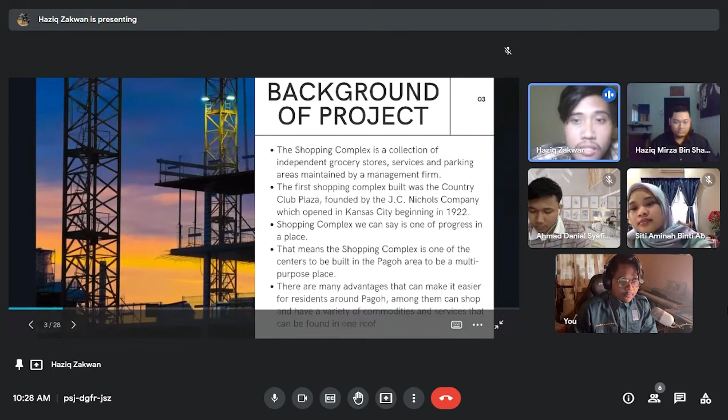Next is about the background of the project. A shopping complex is a collection of independent grocery stores, services, and parking areas maintained by a management firm. A shopping complex is one of the signs of progress in a place, meaning it is one of the centers built in the Pagoh area to be a multi-purpose place. There are many advantages that make it easier for residents around Pagoh, among them being able to shop and access various commodities and services all under one roof.

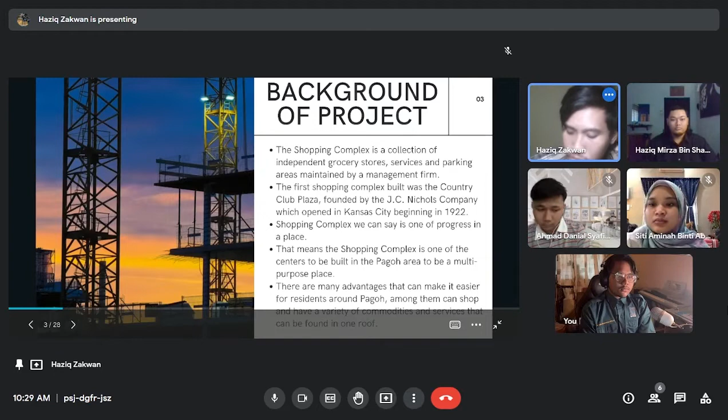For the objective, first, to make it easier for students to use the service, accessibility, and facilities that enhance the shopping experience at the mall and in the surrounding area.

Second, to develop a marketing strategy for acquiring new customers, particularly students, and increase market share. The shopping complex has a large customer base but few student customers. This marketing plan will include marketing goals and strategy for increased market share. Because the shopping complex is not on the normal walk to the university, innovative and strategic proposals are required for successful delivery.

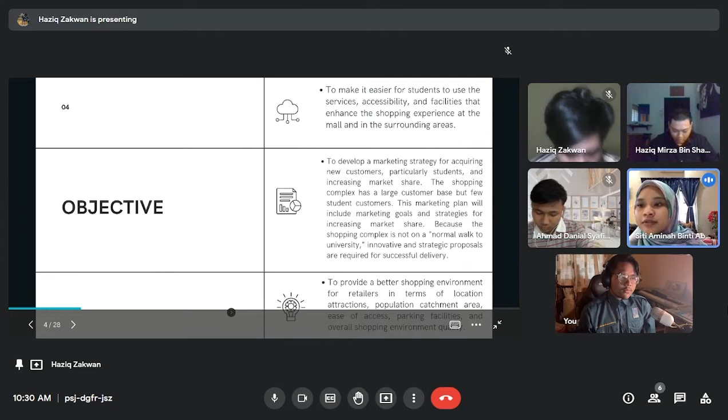For the substructure component of the complex, what is substructure? The substructure is the lower portion of a building that is built below ground level. Its function is to transfer load from the superstructure to the underlying soil, and as a result, the substructure has direct contact with the supporting soil.

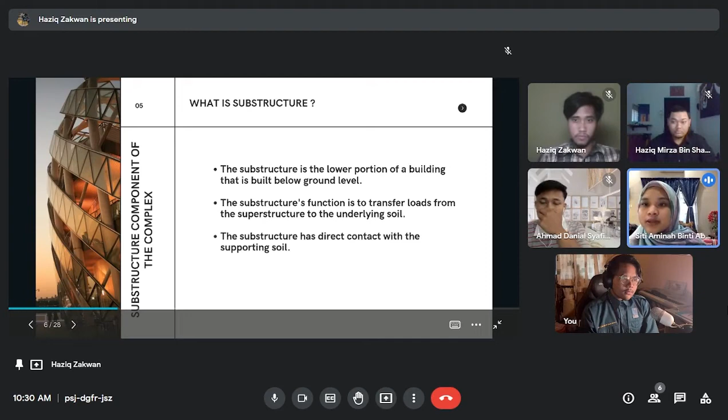For the function of substructure: it transfers load from the superstructure to the supporting soil, and is responsible for transferring load from the superstructure to the underlying soil. As a result, the substructure has direct contact with the supporting soil. It is a portion of a building built below ground level, the structure that is below the plinth, and lastly, a type of level or base that supports the superstructure, walls, columns, and the structure at plinth level.

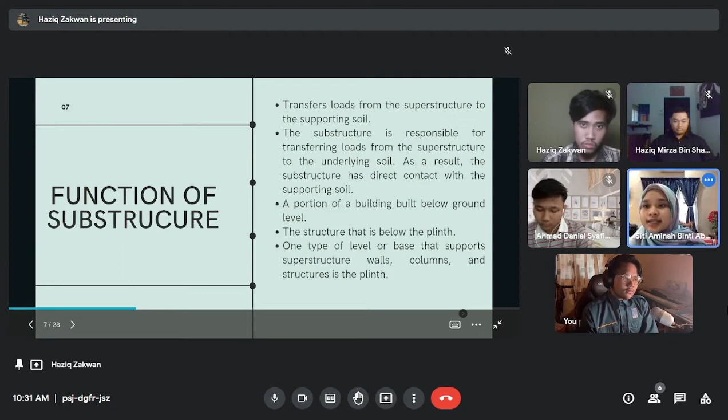For the foundation, it is the structure deep in the ground that is in direct contact with the superstructure. The foundation transfers all dead, live, and other loads that pass through it to the underlying soil. The foundation is built in such a way that the soil beneath it is stressed within its safe bearing capacity. Any foundation failure leads to the collapse of the building structure.

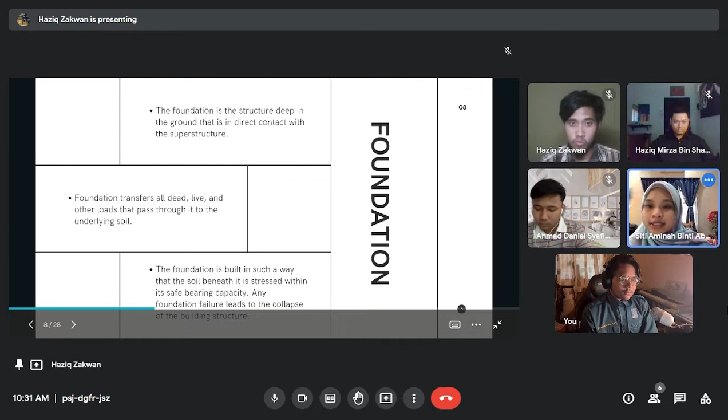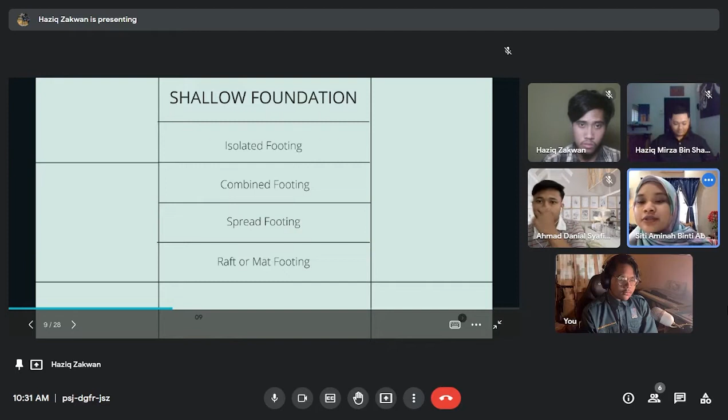The types of shallow foundation are four: first is isolated footing, second is combined footing, third is spread footing, and the last is raft or mat footing. That's all from me, thank you.

Deep foundation has two types: first is pile foundation, and the second is caisson foundation.

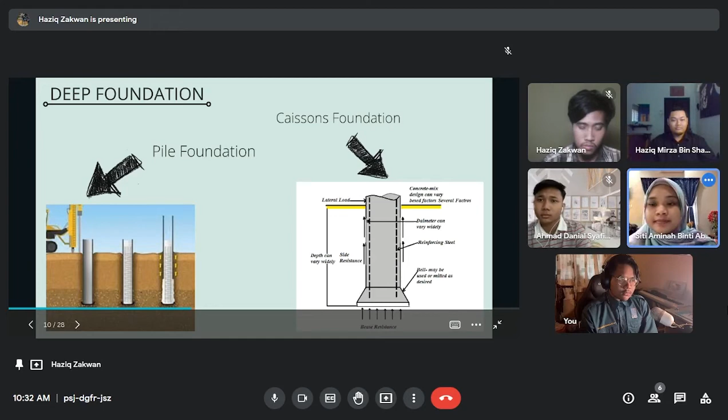Next, the foundation for the complex. For the foundation of the shopping complex, we use raft foundation. A raft foundation is actually a thick concrete slab resting on a large area of soil, reinforced with steel, supporting columns or walls that transfer load from the structure to the soil.

Usually, the raft foundation is spread over the entire area of the structure and its supporting soil. Raft foundation is generally used to support structures like residential or commercial buildings where soil condition is poor, storage tanks, silos, and foundations for heavy industrial equipment. Raft foundations are a type of foundation with high integrity in which foundation piers are connected together using a large foundation slab to form a massive structure, and the foundation piers are connected through beams.

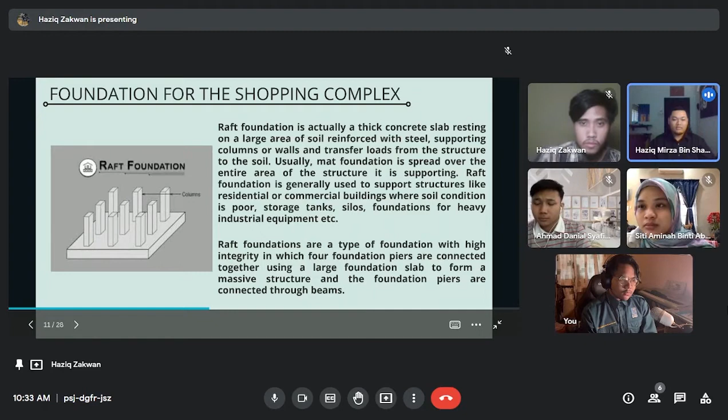Next, I will discuss the superstructure. People will spend the majority of their time in a building's superstructure. This covers the first and second floors of a house, as well as any number of levels in bigger buildings. Beams, columns, finishes, windows, doors, roof, floors, and anything else are all part of the superstructure. Parts of the superstructure are significantly longer than parts of the substructure.

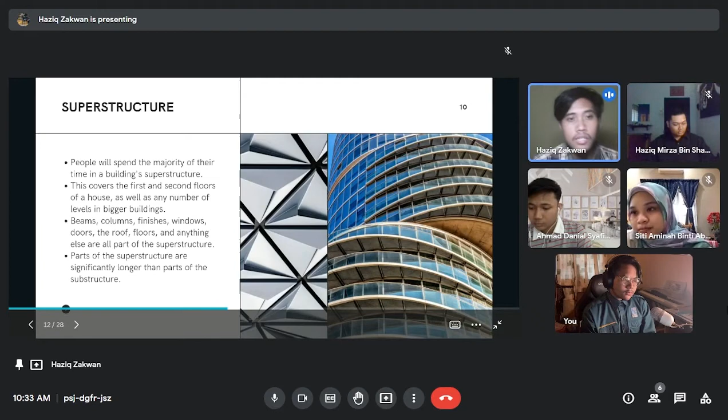This is the function of superstructure. First, the internal and external components of a building are visible above the substructure. Second, it is the structure from the plinth to the roof of the building. Third, it is above the bearing structure and the wearing surface. Fourth, this structure transfers load from the building's upper level to the substructure.

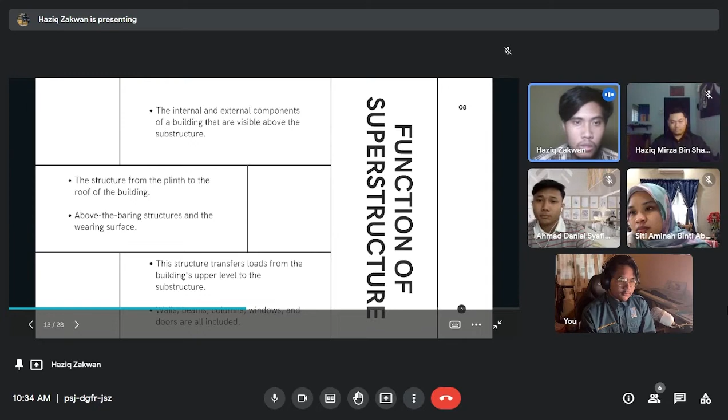This is the parts of the superstructure that we have in our building: the floor, the roof, the beams, the columns, the walls, and lastly the transportation structure.

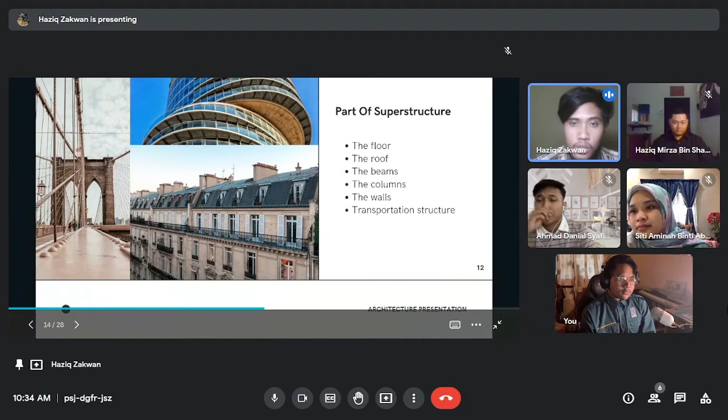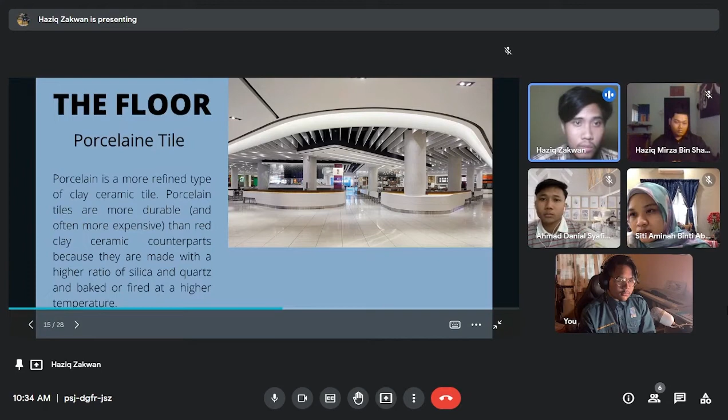The first is the floor. The floor that we use is porcelain tile. Porcelain is a more refined type of clay ceramic tile.

The second one is about the roof. The roof that we use is a flat roof. These roofs are not suitable in areas where the roof may become saturated by rain and leak, or where water soaks into the brickwork. Thank you.

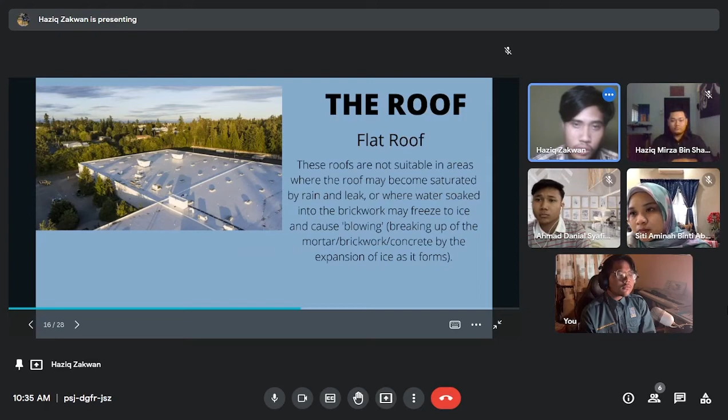Okay, I would like to continue.

The next is beam. Beam has four types, which is cantilever, fixed, simply supported, and overhanging. A beam is a horizontal structure element that spans distance between one or more support and may transmit vertical load across its longitudinal axis.

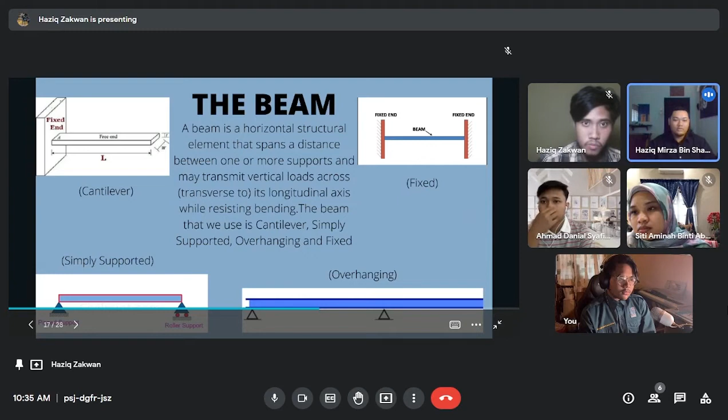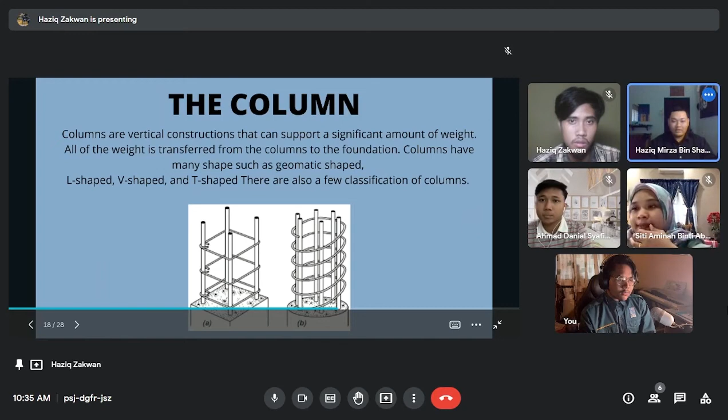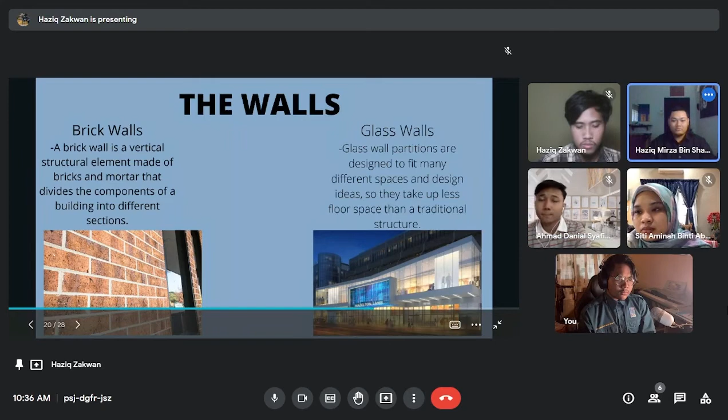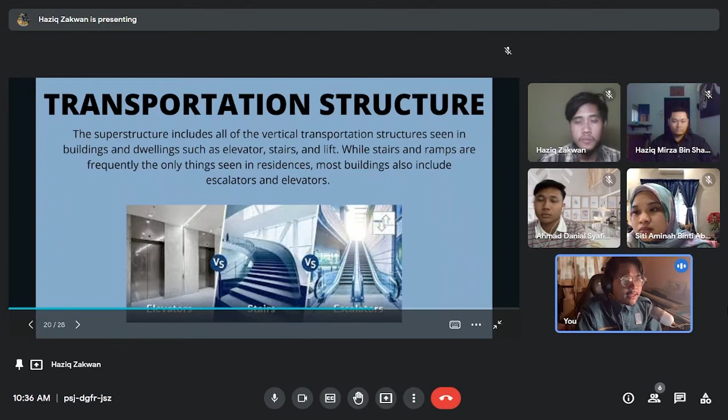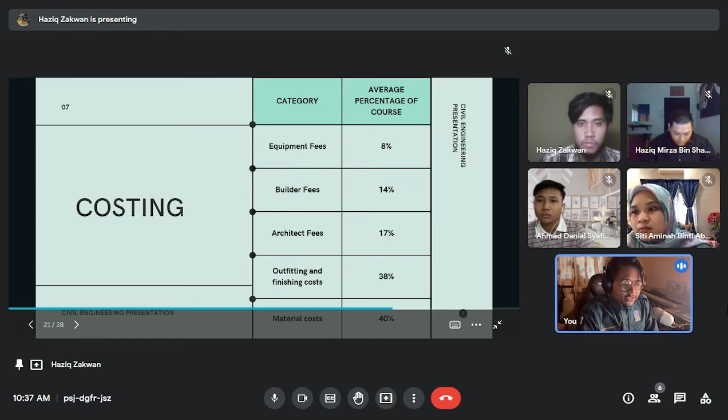Fees for an architect and a builder may be added to the total cost. So the categories for this cost are equipment fees, which is 8%, builder fees, which is 14%, architect fees 17%, outfitting and finishing cost 38%, and material cost, which is 40%.

So apart from that, there is also a breakdown of costing involving the number of professionals who will be working on the construction site. Under the general contractor, this number of professionals will perform the task to carry out the project. However, professionals can also be hired separately to save on the final cost of the project.

This number of professionals also plays an important role in determining the cost for a construction project to be carried out. The following is a list of expected costs for labor payments during the project development. The professionals involved are painter, electrician, excavator, mason, carpenter, plumber, and also structural engineer.

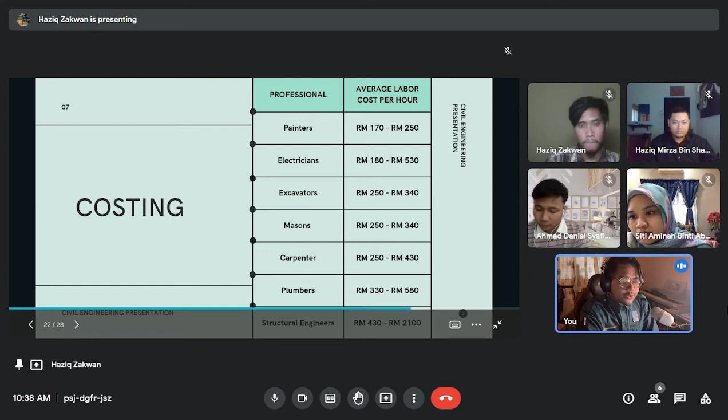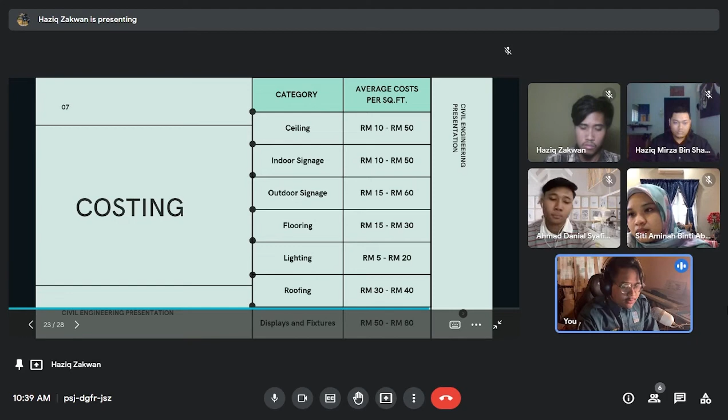So the category for this cost is ceiling, indoor signage, outdoor signage, flooring, lighting, roofing, and also displays and fixtures. So that's all from me. Thank you.

Alright, for the project management and project planning, the important factors which can cause a construction delay during the initial stage are identified to calculate the delay rate so that the necessary increase or reduction in material usage can be computed in advance. Controlling the construction process based on the framework duration, improve on the process of integrating the actual data into the schedule management for a shopping complex project.

The planned, actual, and delay data for the construction by construction material type is entered as input data by the year, month, and date.

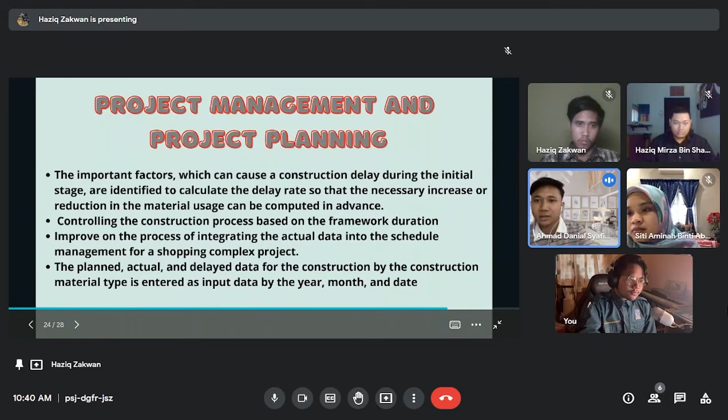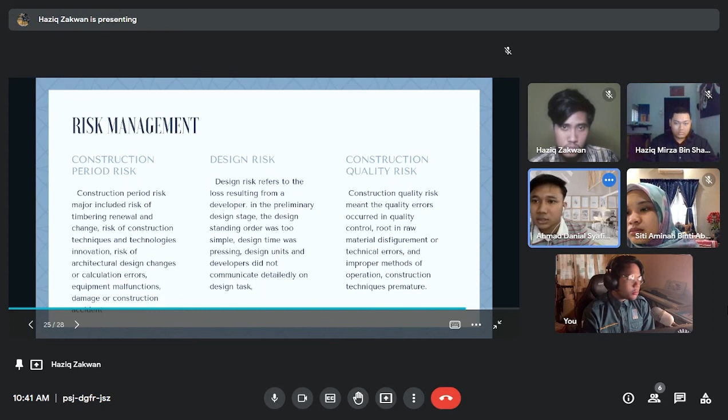In conclusion, we can say that a shopping complex is one of the multi-purpose facilities to be erected in Pagoh because Pagoh area is also one of the developing areas. The ability to shop and enjoy a range of goods and services all under one roof will make life easier for residents in Pagoh area.